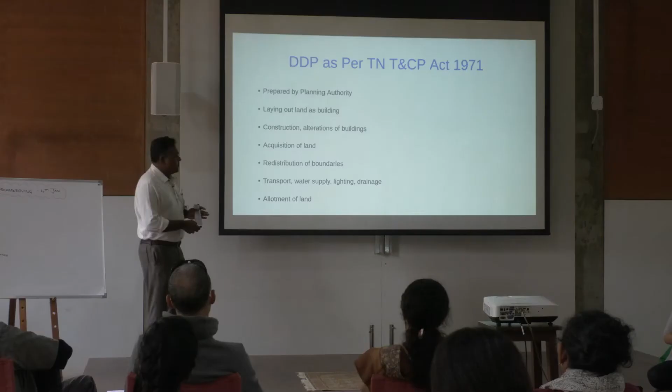So now we know it. Let's start from the broader level and zoom to where TDC is in this aspect. Now like I said, in the Tamil Nadu Town and Country Planning Act, the first thing it says is DDP can be prepared only by a planning authority. So that is the first important step which it mentions.

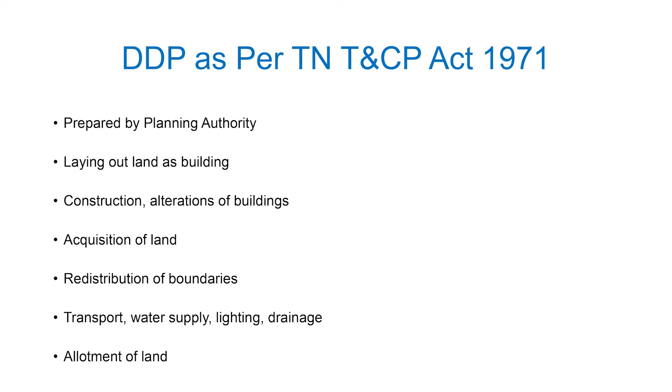Now apart from that, what does it mention as being a definition of DDP? It talks about what are the layouts of the building, how constructions and alterations can happen, how land acquisition can happen, what is the rationale for acquiring lands, how the boundaries can be distributed, all the infrastructure, how it has to be laid, where it has to be laid, what is the capacity, all the details regarding infrastructure, what is the allotment of land, housing, parks, and all the zoning regulation bylaws. Now this is what actually defines the minimum.

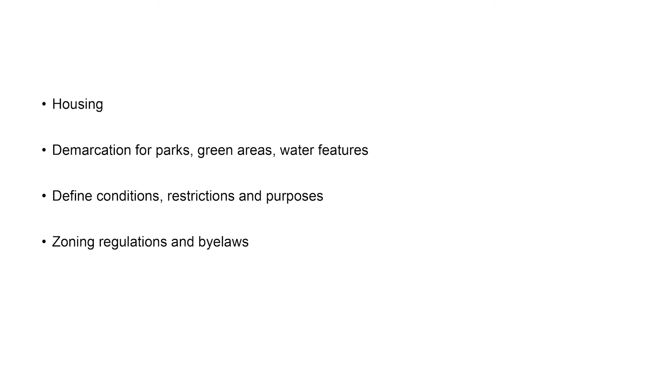Now if you could actually see, mostly it talks about housing, buildings, land. There is one which talks about green area and water features. But this is the minimum which expects us to fulfill in creating a DDP.

Now, where are we starting from for the DDP for Auroville? Ideally, we have to work within a certain framework. So when we went through it, we had a lot of discussions, we met a lot of experts, and what we see is there are 4 important layers which need to be addressed while preparing a DDP.

What are those? Obviously, the master plan perspective 2025. It has to be derived from that. That provides the larger framework, that provides the policy setup.

Second is the state planning norms and standards. It could be the laws of this land, it could be the fire control norms, it could be regulations for physically challenged, whatever it is. These laws have to be respected.

And there's something called the Amrut guidelines. Right now the government at the center in Delhi, through the Ministry of Housing and Urban Development, has formulated the Amrut guidelines. What they intend to do is ensure that urbanization happens in a very planned way. They have come up with a certain set of standards and guidelines. We should not lose track of that, and it will be in our favor if we prepare a DDP which respects that, because ideally, when all the towns are being prepared as per Amrut, when all these things are stitched together, we should not be left out.

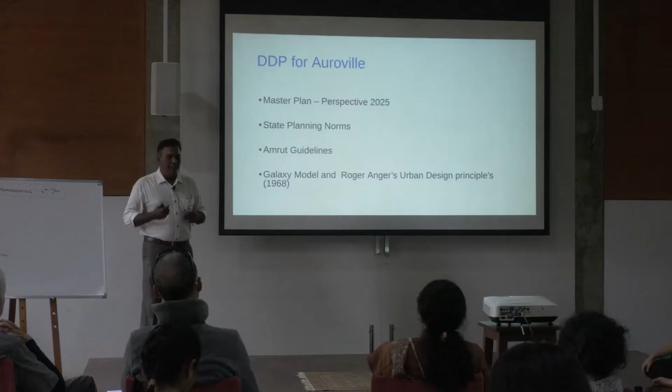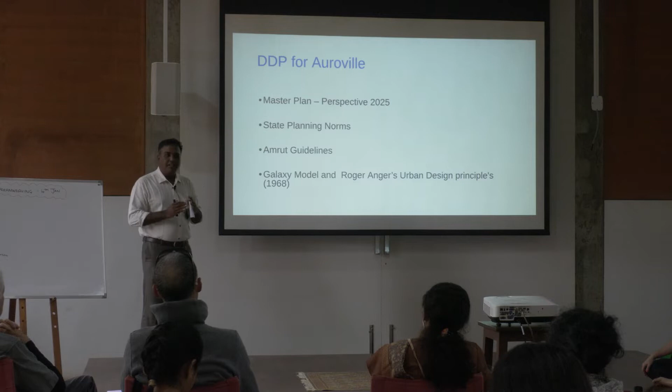One important thing is that right now the state government has started working on regional plans. They have started to divide Tamil Nadu into regions, and they have asked to come up with regional plans. Each regional plan would also come up with a perspective plan, and it is important that we identify where we stand in that. Otherwise, it might be very difficult for us to really merge and overlap with the surroundings. So these are very important considerations which we have to take into account while preparing it.

And the fourth, most important, is of course the Galaxy model and Roger's urban design principles, the Galaxy model of 1968. Everything actually starts from here, so this is the starting point. So what we are formulating is a DDP which works on all these 4, which takes care of all 4 and respects them to the fullest.

Next is what are the aspects of the DDP which we will actually be covering. We would be starting from a regional context, obviously understanding where Auroville stands, how it is making impact, how the connectivity are, what is the economic impact. The regional context is something which is very important for us to understand.

The master plan context and the history of the galaxy - these 3 are something which will give us a clear introduction. It will set the tone for how we move forward.

Then we start by doing analysis. There's quite a lot of analysis usually - land use, existing land use, transportation infrastructure. There's quite a lot of analysis about the existing situation that has to be made.

And then we work on understanding the site potentials, frameworks and constraints. There are quite a lot of frameworks - you have to really understand them because they talk about urban design. The most important is the urban design framework, which has already been created by Roger, which we need to stitch together and evolve and take further. There are frameworks for water, and quite a lot of other things which we need to understand and work with.

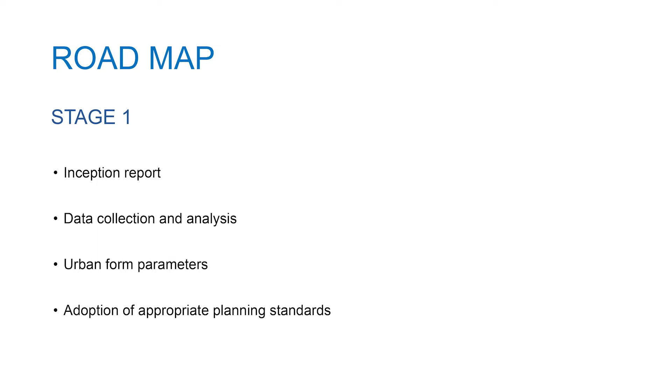There's a mobility and infrastructure planner from Bombay we are in touch with. Anupama is now part of the technical team of TDC. We are in touch with Andrea Camerata. We are reaching out to all the consultants who have been part of TDC in the past. Jacqueline and Omar have been great advisors to us. So there have been quite a lot of people helping and supporting us in moving forward.

This inception report will help us define the roles and responsibilities and see how, as a team, we could move forward. Then we have the data collection and analysis, then the urban form parameters - defined by Roger, which, as I mentioned, involve quite a lot of sketches and other things, and appropriate planning standards. So this is the first stage which we have worked on.

Now the second thing is we will be working on identifying proposals. The uniqueness about Auroville compared to other towns - and I want to address the larger audience in the community on this - is we have a certain form and a certain way the form is grounded. So we need to understand that and move from there. Unlike in Pondicherry or elsewhere, where an urban sprawl is being contained, here we are not starting from an urban sprawl - we are starting from an urban form with a clear definition, with zones, usage for zones, and many other things.

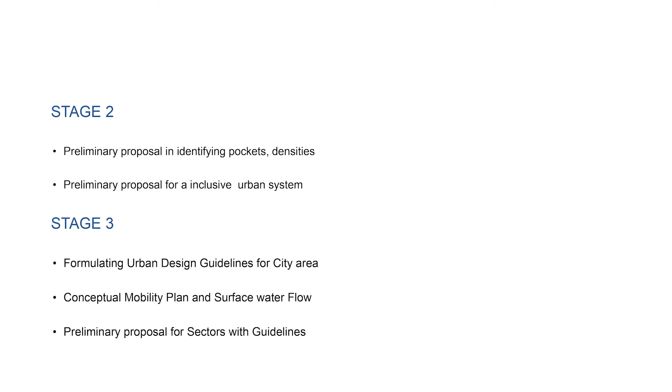The next step is coming up with an urban design guideline which will help us formulate the mobility pattern, because now we have the densities, we have made simulations of the forms, we come up with analysis, and then we have certain urban design guidelines, which will also help us understand how the mobility could work on a very preliminary level. And the most important is the surface water flow - how the surface water flows.

Based on this, we'll be coming up with a preliminary proposal for sectors. These are very preliminary, conceptual level things, which would then be taken up with infrastructure planning, because based on this, the infrastructure plans would be formulated on a preliminary level. This would eventually help us come up with guidelines, final infrastructure plan, layouts, demarcations, phasing plan, implementation plan, and finally a submission of a draft DDP.

So this is the roadmap which we are looking at. I might also be a little bit wrong - I think Mr. Rajiv is the best person for this.

It might also go for a change, we might shuffle it here and there. But more or less this is the extent to which what we are looking at as part of DDP.

This eventually means we would start with understanding and respecting the realities. We also respect the urban form and how we ground that urban form to the reality on the ground. I'm extremely happy that the Dreamweaving session is an attempt to move in that direction where we understand the form.

Not only are we going to decode the form, but we are also going to work out the details of how the urban fabric can be built, how it could be phased, how it could be implemented. Ideally, if it's done, I think my contribution to Auroville is done. I can retire and go back and live in Ooty or something like that.

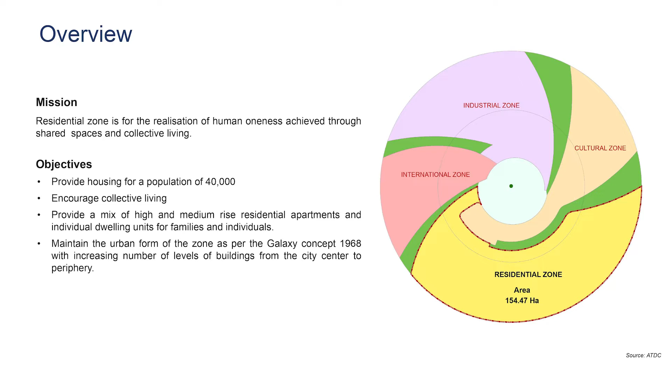Now, this is the proposed land use which is actually present in the master plan. I'm just giving you an example of what other things we have collected. Now, for residential zone, if you see, we took what mother has mentioned about residential zone, and we also looked at the master plan as to what it talks about. So we have just roughly put it up so that the consultants could understand how different this residential zone is when you talk about a residential zone in an outside world.

Now this is very important because it's important that we need to define where we are and who we are to the outside consultants.

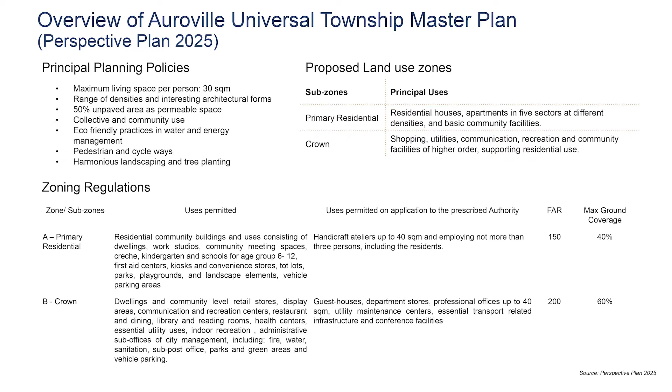And these are the important pearls, I would say, from the master plan, where it talks about the FAR, it talks about the ground coverage, it talks about living space per person, it talks about 30 square meters, it talks about 50% unpaved area. All these things are planning policies which have been defined in the master plan.

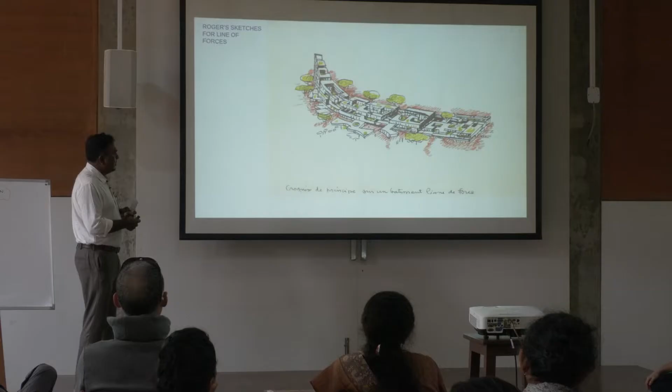And we also started archiving and finding out the sketches of Roger. Like if you see, this is one of the lines of force. So many people have this misconception that the line of force is one humongous, huge box. But actually it's not. When you look into his sketches, you'll be able to understand he has played quite a lot with climate, and with the experience of it. So these are also very valuable for us when we present it to the consultants and we're working on understanding the urban form.

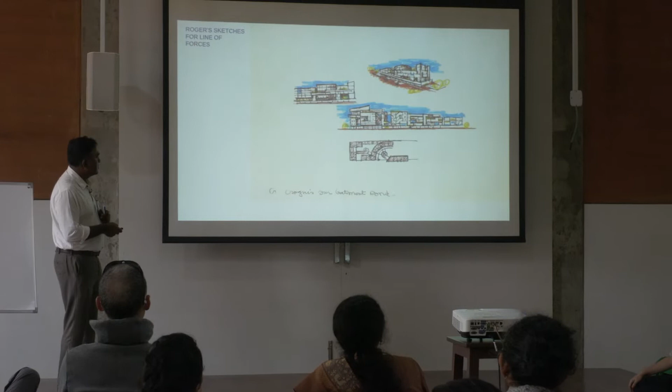These are some of the other lines of force. So you could see each of the lines of force are completely different. They are not exactly the same.

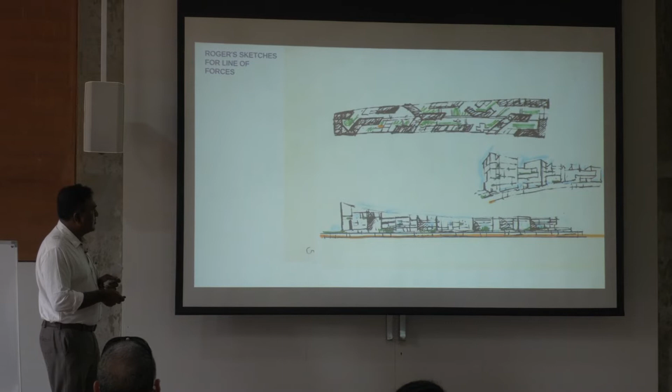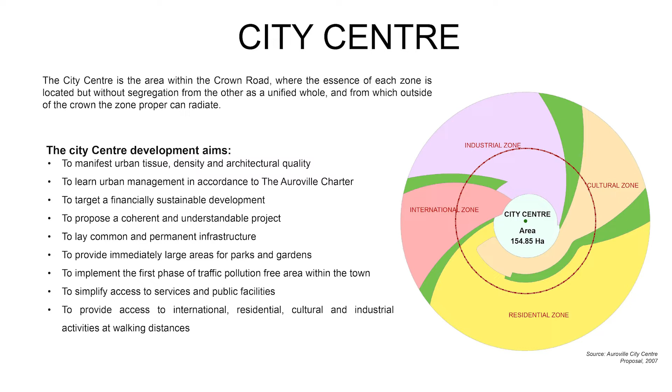Yes, so I come to the city center part of it because I think the crown is mostly what we're talking about. I just want to present the data which we've collected regarding that. So we all know that the city center is actually the one inside that crown. And it's interesting because all the zones kind of merge in the city center, and it's a microcosm of what Auroville could actually stand for. You have the schools, you also have the residential, you also have the industrial facilities, and you also have the social fabric. So everything is built in for us to start evolving. I find it very fascinating that there is somewhere a zone where everything overlaps, mingles, and in a very harmonious way.

Now, what you see here is what the city center develops into. The aims of the city center are things which we found from the past archival data and everything, which we have kind of compiled. So, to manifest the urban tissue density and the architectural quality - like I said, this somewhere merges everything, brings everything together. And this would set the flavor for us on how to grow on a much larger scale.

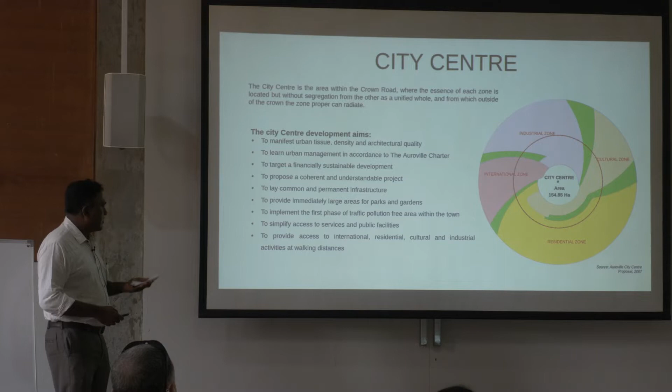Urban management, financial sustainability, infrastructure, parks and gardens, mobility - you name what is required in a town, everything has to be addressed when you're talking about a city center. Maybe you can't probably say this when talking about any other zones. But in this part, all these things come together, and if you're able to work on creating a good city center, I think creating the rest of the town should not be much of a problem.

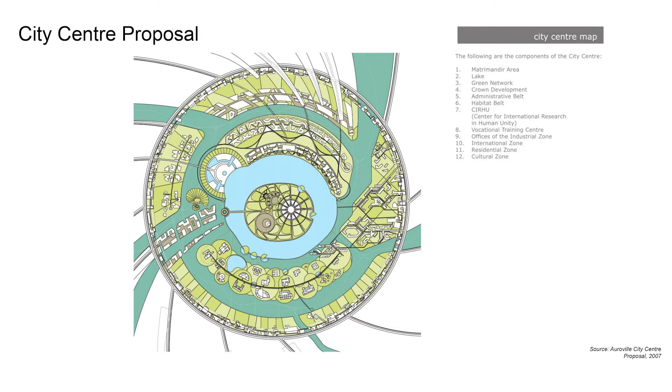Now, this was one study which was made by Anupama under Roger's guidance. What was interesting also for me is there's quite a lot of cycle paths - I don't know, it's not so clear, which keeps meandering. I could see they had worked out even a toy train over here because these are all kindergartens. And the existing buildings have also been integrated into it. This is the existing solar kitchen, the footprint of the solar kitchen, if you could recognize it. And this is the Poramboke land which actually goes through. So this is a study which we also had to go through.

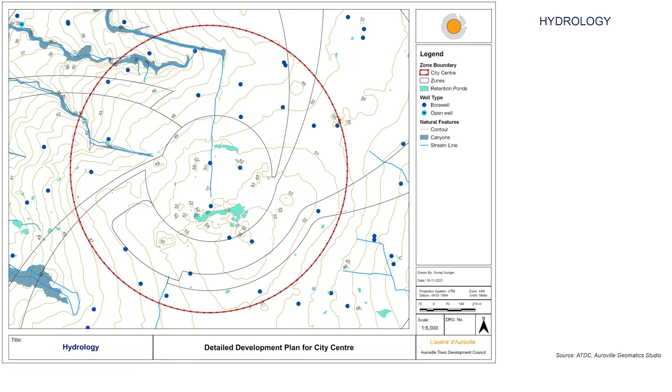And the drainage and watershed - unfortunately, there are certain things where the data were lost, so we had to get the data, we had to rework on certain things. And this was one. And then that hydrology, I think the geomatics team has been mapping it, identifying it, so we took those data from there. The geology was already there from water harvest, which we had to convert into GIS.

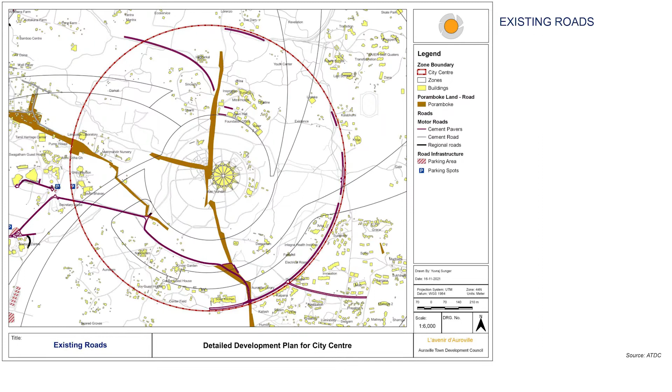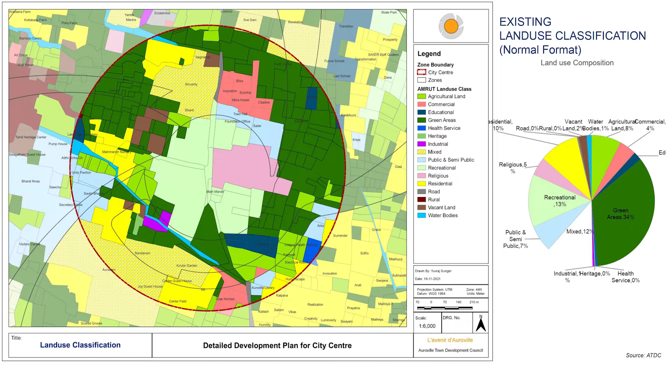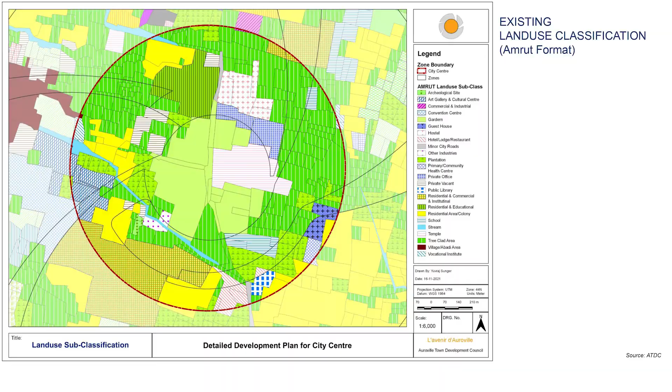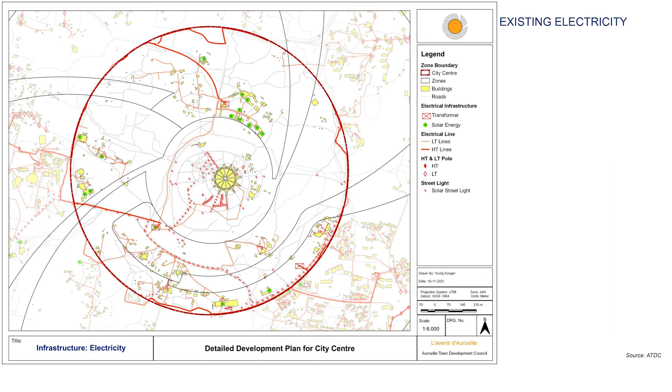Now, if you see this, this is being prepared as per the AMRUT classification. And then this is a sub-classification of AMRUT which we had created. These are all the AMRUT classifications and sub-classifications. And then water supply lines have been documented, sewage lines have been documented, existing electricity has been documented, telecom - galaxy footprints and overlays. So interestingly, everybody must have known by this time.

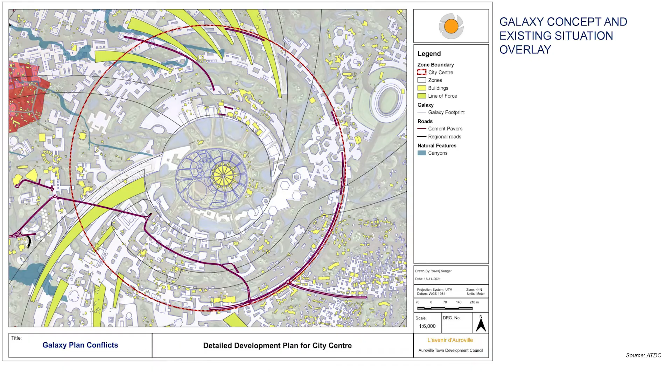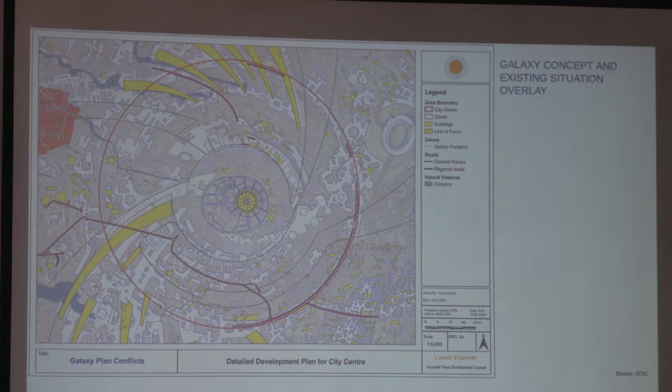So in the industrial zone, you see all these lines of force actually fly over the crown. And similarly, if you see in the residential zone, the Line of Goodwill and this small line of force are actually in the city center. So we also talk about the lines of force. We also talk about high density.

We also talk about our economic values and system if we really have to look into it. If you're talking about a line of force which is really high, are we talking about making candles sitting in that line of force, or what industries are going to come there? Agarbattis? No, I don't think so. Maybe something else would be there.

So these are very interesting questions which need to be discovered. For me, the galaxy is not about the answer because the answer is there. I think what we have to seek is more and more questions. The minute we seek more and more questions, then I think we have really understood it.

So, I hope it's quite fast. Just to conclude, there are certain things which we are trying to match to the norms of the government, there are certain things we have to work on, understanding the realities of the ground, the geographical realities. At the same time, we also have to be faithful to the vision and respect the master plan. Within this broad framework we are trying to work, and I think this gives us an immense amount of flexibility and scope to do something of world class.

What I have seen personally is you need to have a very high quality of output to really bring these things out. I don't think a galaxy expects a certain amount of mediocrity. It requires a certain amount of faithfulness in interpreting it. And I hope all of us will be able to do it.

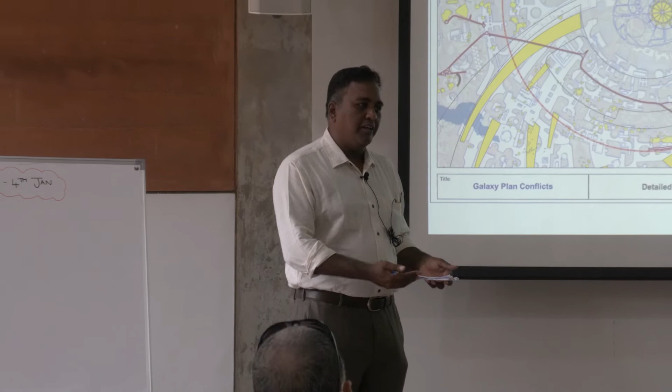that is what we would be considering as the plot, and based on that, the guidelines would be given. So let's say you have a line of goodwill, you actually define a little bit in and around the footprint as to what the impact will be. That could eventually become the plot, and you have an FSI defined for it. This could be one possible solution, something which needs to be worked out. And the third is about the green belt.

Yes, I'm happy you brought this out, because when we talk about the hurry in building, two years before, from Kuilapalayam to Certitude there was no development. Right now we see development has come all the way till Certitude, and probably in another 2 years, maybe till Sola Kitchen.

Maybe another 2 years, I bet, probably till Matrimandir. So I think now we really have to move forward to tell the world, look, this is Auroville. We are actually working on it, and we need all your support. And yes, that's also being pursued.

Now, one of the things I mentioned in the DDP also talks about acquisition of the land, because it gives us more credibility. If you go and say, I need land, why do you want it? Because Auroville wants it - that can't be a legal answer to a state government.

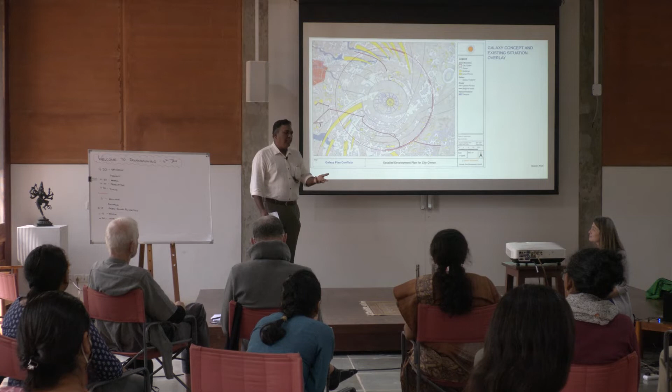Now, when we say, look, this is a social experiment, and we are talking about a town here which has the potential to help humanity move forward, and therefore we are acquiring this land, then I think we have a much better case. And how do we tell that? The DDP and the master plans are the only way to tell, because it's sitting over here, we need it.

So land acquisition is already happening, we have been pursuing it, and this will add more weight and more strength to that. The faster and better we are able to do it, we'll be able to reach there with a much stronger force. But the DDP doesn't cover the green belt, right?

Yes, it has to also cover the green belt, because the green belt is where all the land is going. In the city area, most of the land has already been acquired.

See, the green belt is a little bit more complex, because if you look into the whole of Auroville plateau, it has a ridge which runs from northeast to southwest. Traditionally, the ones on the western part had farming lands - that's why you have all the villages, like Sidenchavdi, Kotakarai, Alankuppam, Rayapudupakam, and then you have all these lakes and everything. Now we have marked them under a green belt, but they are actually growing much faster than us.

And maybe in 2 years the whole area would be urbanized. We can call it a green belt, but I don't know how we tell people that it is a green belt. We have a much better chance when we look into the eastern side - when you start from Amiabri, from Certitude all the way till Revelation, probably we move much faster there.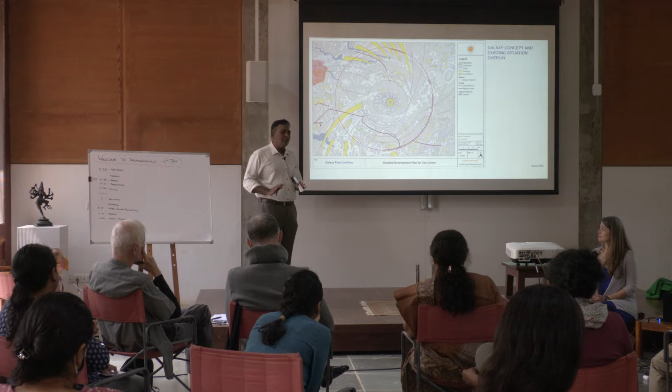For the green belt, we also need to deal with two governments: the government of Pondicherry and the government of Tamil Nadu. So when you do a DDP, you do it separately for the Tamil Nadu portion. For Pondicherry, the government is already working on a development plan for Alankuppam and has published draft plans. The best case for us is to integrate that. I doubt whether we can erase and redo it; I think that might not be possible.

That half answers my question.

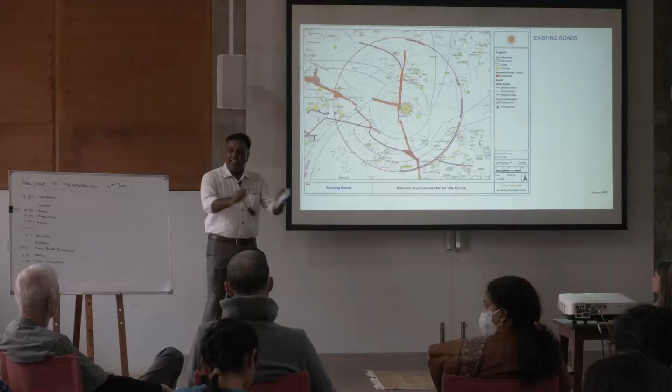I have two questions. One I can try to set aside for later since it's about the larger picture, but the other is directly related to Crown and the dream weaving. Especially in the western part, we have two canyons and lines of force crossing across the Crown, and there's a critical situation with an Ode Poramboke, a line of force quite contrasting to that, while the Crown is a pedestrian-based movement. So will we have the same map that was there for this area? Will there be guidelines we can already take into account, because we'd like to know what TDC is thinking about the larger aspect, since there are water catchments there. Will planning take into consideration the water and ground aspects, or should we just start from a blank paper as if there's nothing there? For architects like me, who are very new to all this, it's a bit of a critical place to think about these contrasting elements and bring a solution at that level. So if TDC has already thought of some guidelines that can feed into our process, we would really appreciate that—it would ease our work.

And the second question: I saw the existing land use according to the Amrut categories that was presented, but as I understood from working there, the next step was to prepare a proposed land use, since we have different, very special zoning of four different zones. Stitching that to ground reality, for example in Kottakarai we have galaxy footprint even where it may not be possible to build. The idea was to get the proposed land use through government, along with guidelines for each plot, and then come back and develop according to that. Or if we say we can't actually consider the Kottakarai area into our city because it's developing in its own way, and the galaxy footprint there also counts toward the city's development, will there be a compensation plan for those kinds of critical areas elsewhere too?

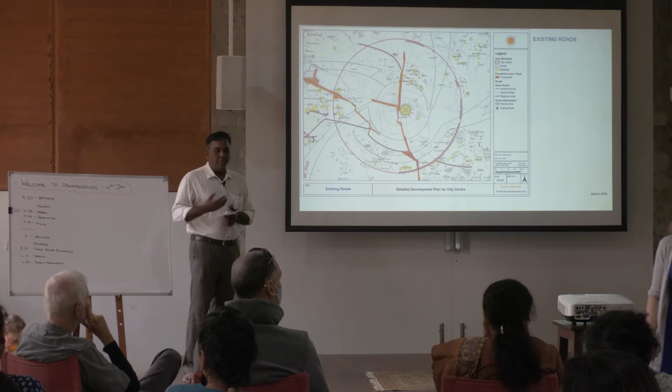The first thing is regarding water. Obviously, water is a very fundamental layer. If you ask me personally, the water lines are what actually create the green lines over here, because we are a rain-fed region. How the water flows is very important for us to sustain our town. So water lines will be respected, have to be respected, there's no doubt about it. Now, how we find a technological solution to overcome it is the key challenge for us - technological solutions, policy solutions, whatever it is.

In terms of policies, we do not have any right now. I believe the Dreamweaving is all about decoding the whole form of the galaxy and trying to see how it can land beautifully in the ground reality. So I don't want to give too much constraint that would distort all these things.

Third is regarding land use. When you were there, we started working on the land use, but unfortunately we had to rework quite a lot of it. So what you're seeing is an updated version, prepared with the help of planning students from IIT Kharagpur. We had to take this to the Town and Country Planning Organization in Delhi, where they also checked it.

I think also Vastu Shilpa had an expert who helped us refine certain things. So this is an existing land use, but the proposed land use will be prepared at a later stage. Until we know exactly where the line of force sits and all these things, only then could we create a proposed land use. So proposed land use doesn't come hand in hand with the existing land use - there's a certain analysis based on which you come up with a proposed land use.

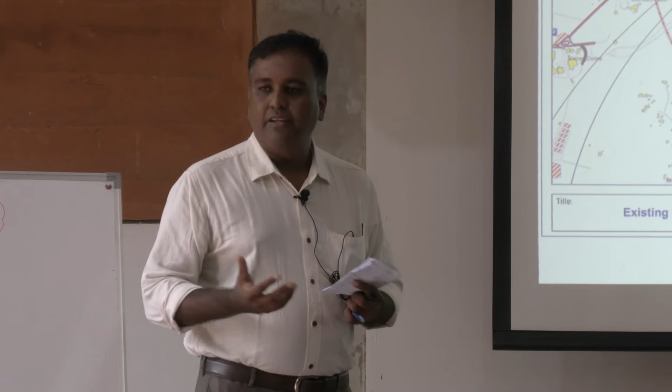Now, if you're looking at compensation - in the city area, except the Bharatipuram area, the good thing is the rest of the city area has no habitation or settlement. So that's the positive thing. Now, how we address the Bharatipuram area... these are private lands, but I'm talking about human habitation and settlements.

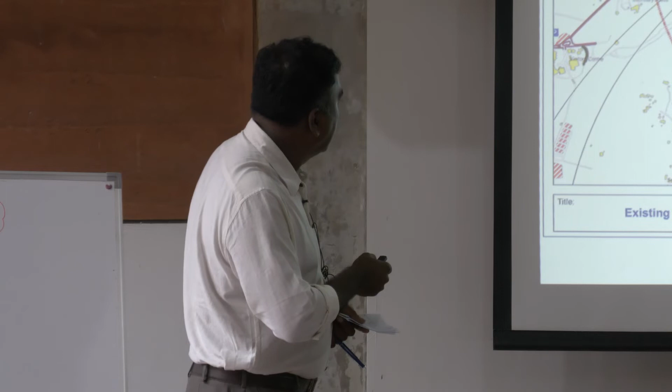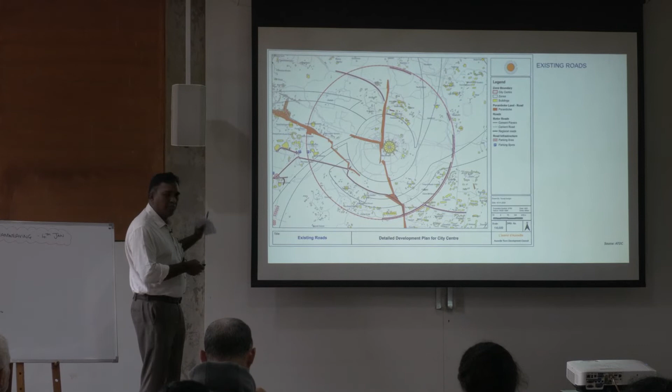So what you have is only in this area, where the Poramboke is, I think somewhere here - this is the only area where we actually have human habitation and settlements, which has happened in the last 10, 15 years unfortunately. The rest, we might have private lands, but we don't have village settlements and other things. So again, when we do this form simulation and look into the realities and match it, we might have to compensate for certain things we're losing there by going to some other place, or come up with a phasing plan to see whether these could be acquired. These are things which need to be explored.

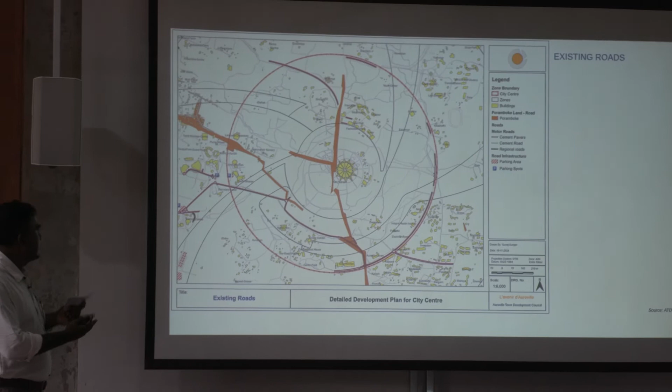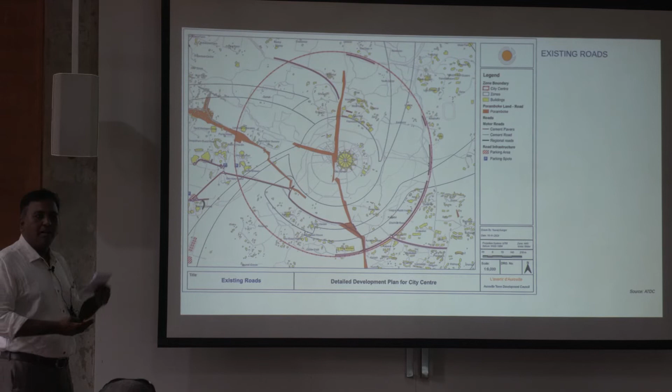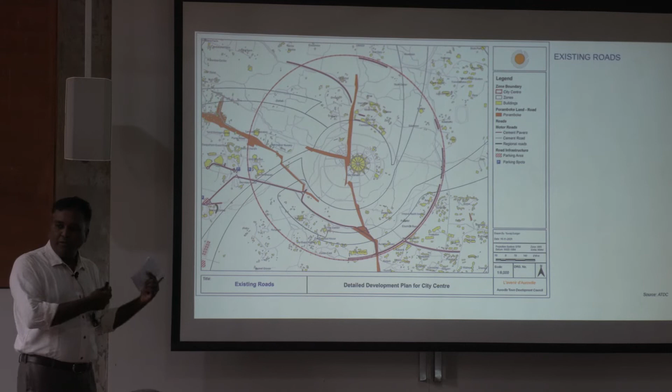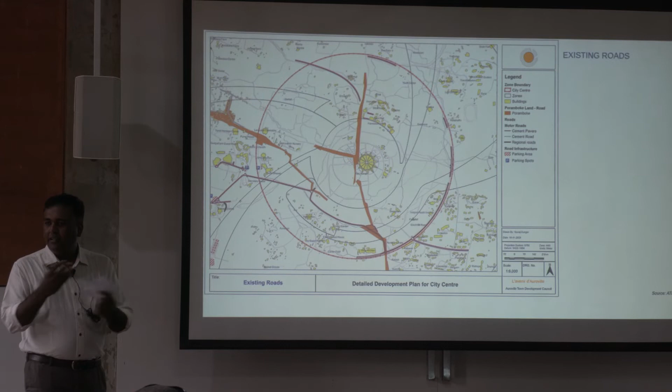Ideally, the first thing would be to see whether we could achieve everything over here as part of the galaxy. If it doesn't happen, then probably we need to shift things. But how do we address it? By giving recommendations and policies, we can update the foundation to say look, these are the things, and if this could be helped in a certain way, we'd be able to get back the land. And if we've lost all options, then probably we have to look at how we get updated, migrated, adjusted, or something - that has to be done.

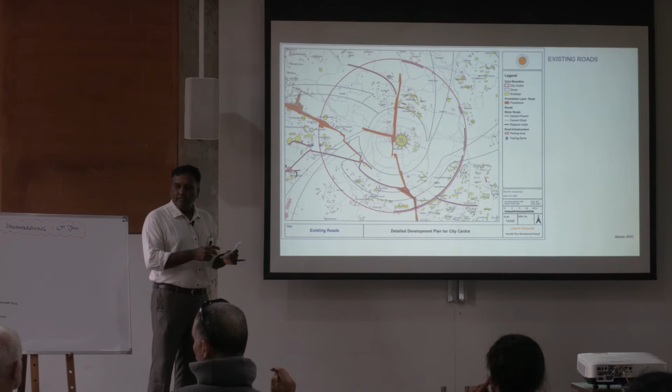And the timeline which you're looking at - so timeline, I was not clear. Timeline for what? I was thinking what should be taken into account, because land compensation will have a longer timeline. So right now we are in a different phase - how do we incorporate those kinds of scenarios?

Like I said, let's keep that aside. I think the vision is to understand and decode the urban form.

Water is something which has to be there. So there are certain elements like percolation and geology. These are things we can't change, the whole geology. But if you have anything specific, we can look back and address it specifically. My suggestion right now is to consider that land is available, and if you could work on it, that will be helpful.

Personally, I think this whole thing is about movement and positivity, so let's keep that momentum up rather than getting blocked into all these nitty-gritties.

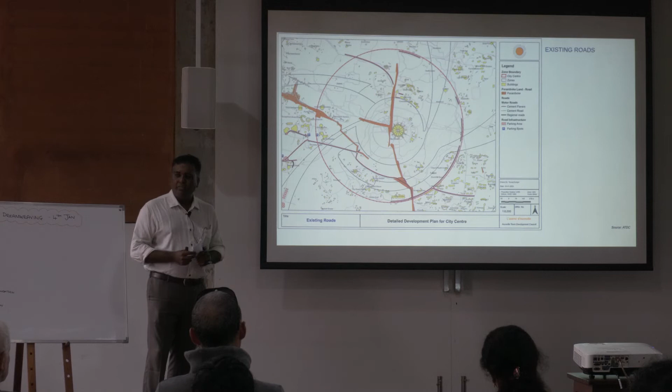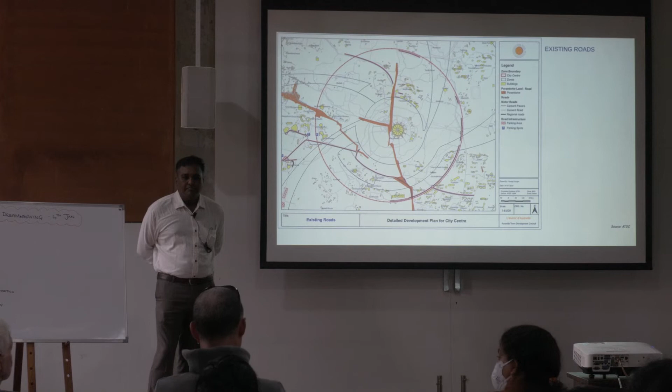There was one observation when you talked about the aspects of a DDP, especially for Auroville. I was missing as key aspects the dream and the charter. I think they are really important and are for me the main raison d'etre for Auroville. So maybe they can be integrated in whatever step we are doing. And then it was about the DDP being prepared by a qualified planning authority.

I don't expect answers right now. It's probably too short, and maybe this is also a bit provocative. The question many people in the community are asking is if the present TDC is actually a qualified planning authority. There has been a lot of people coming and going. You are the only architect in the whole community-appointed team. There was one question, how do you stand with that?

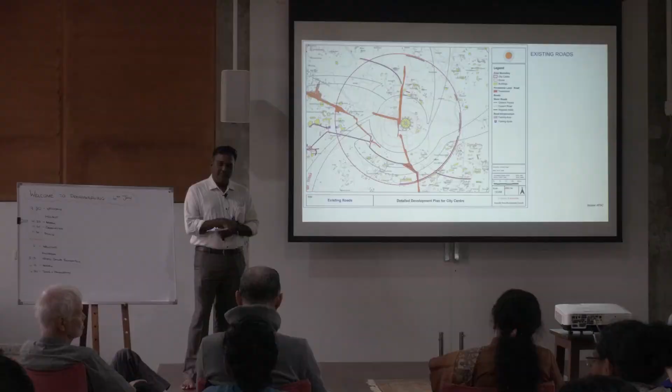Coming directly to who is the client body of the present TDC? What is your relationship to the RA? You have published some statements giving the impression that you are not really feeling bound by the RA. And as you've mentioned many times, we are in a proposal or exploration phase for all of that, and this will be presented and needs approval. So why are we actually creating conditions on the ground when we don't really know where we are going, what we are doing? Thanks.

So the first is, yes, the charter goes without saying, I think definitely the charter and these things are the key essentials. Nothing starts without that, so I fully agree with you. There's nothing for me to go about it.

I think we are in a very critical time, talking in terms of the development happening around us, and I'm sure you'll also agree with it. How do we go and present ourselves to the outside world? We need to have certain legal validity. The Act and other things give us that legal validity. That is the only thing. We stand on the Auroville Foundation Act.

And the Act has a certain definition of what the governing board is. The best way at this point for us to present to the outside world, when we are doing the DDP and working with all these things, is to ensure we are legally compliant to meet with other departments on the other side of the wall. The best way it can be done is it has to be officially authenticated as per the Act. The Act mentions a governing board, and the governing board has issued us an office order, based on a standing order. Now what this empowers us to do is go and talk to, whether it's TCPO or whatever we want to do.

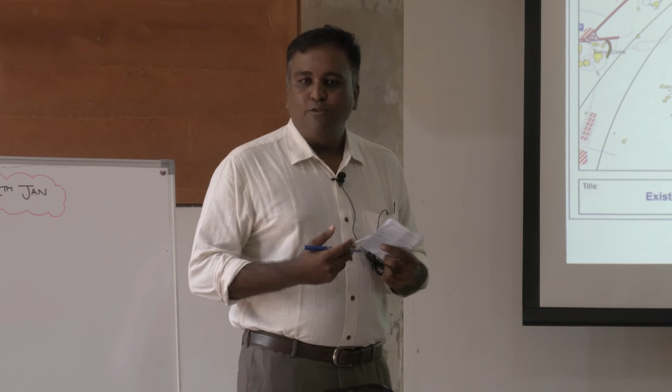See, for me, it is all about being bold in getting things done. Now, I also want to be like all of you. I would like to go and have a good sleep, spend good time with my wife, and have a happy thing.

Because I see this is the easiest way to move forward. It will help us to collectively move forward. Somewhere we need to legally ground ourselves. We need to identify what we are.

And like I said, the development which happened from Kuilapalayam to Certitude is a wake-up call for everybody. We can talk about what we are, how we are, for another 50 years, but will the outside world wait for us? I don't think so. They're going to keep moving in, encroaching on us, or working for whatever it is.

And my biggest fear is, in the end of the day, we'll be refugees in our own land, something like that. So I feel this is something which is very time bound. It has to be done. These discussions could always happen, and probably we have all the time in the world, but these things should not be stopped.

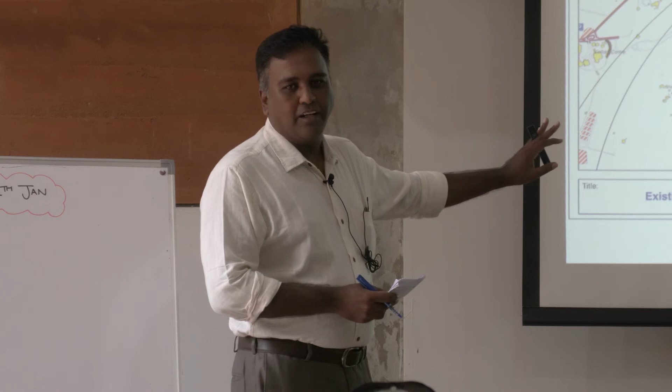And I feel that this needs to go ahead. My contribution is, I come from that point of thing. And the others in my office also, I'm sure they are there because they feel this would help things move forward. Maybe in the long run you will be able to see the things, but right now, from my point of perspective, I find this is the right thing which I can do.